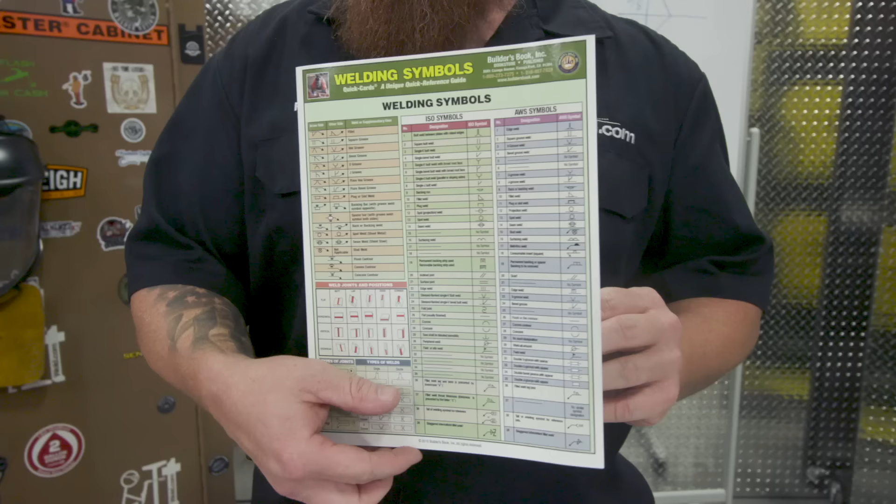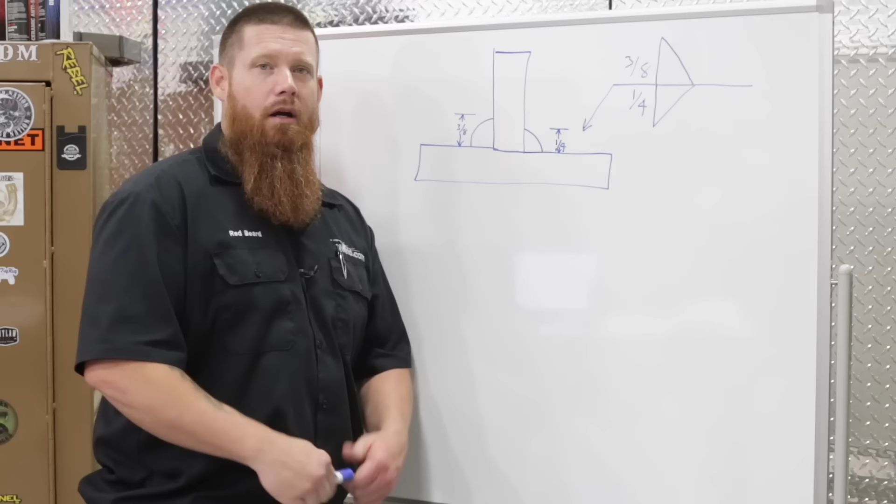All right, let's go back to the board for a quick recap on fillet welds. Last time we discussed arrow side, other side, different sides of a weldment. In this case, it's a fillet weld on a T-joint, so we have arrow side 1/4 inch fillet weld, and other side 3/8 fillet weld.

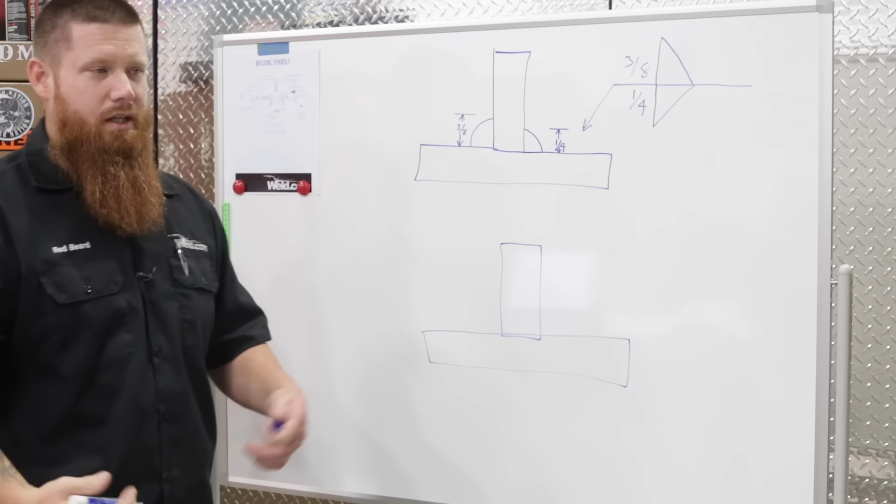One additional thing we can do is if we have unequal leg lengths. This isn't something I've ever come across myself, but if the engineer specs out for unequal leg lengths, this is what that symbol would look like.

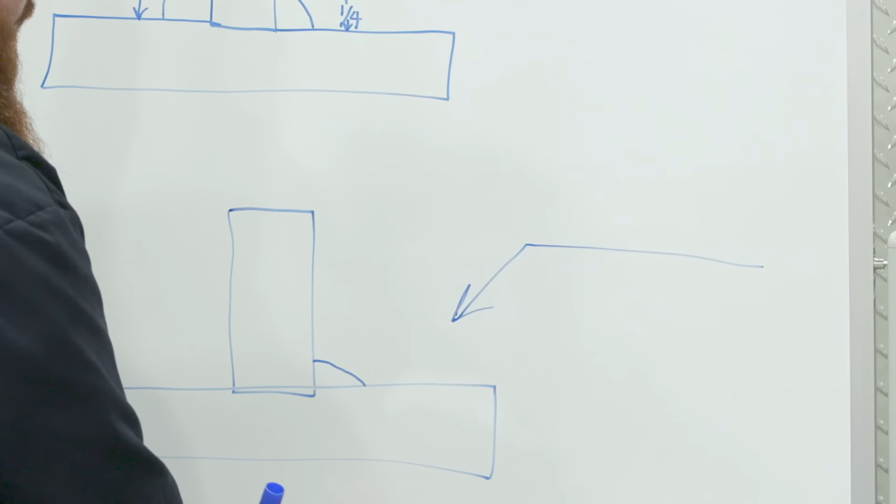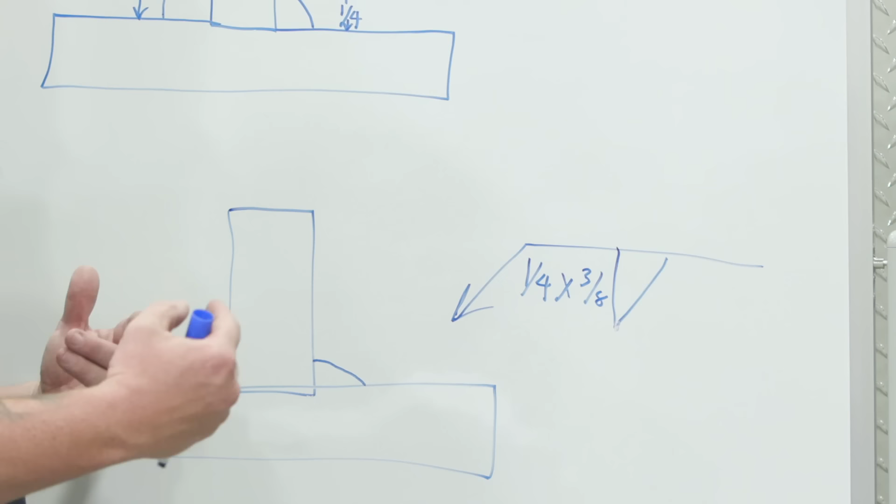It's going to be the same thing—arrow side or other side, doesn't matter. In this case we'll go with the arrow side, and let's say they want a 1/4 inch height here, and 3/8 this way. So that's written with the same fillet weld symbol, but it says 1/4 inch by 3/8. That tells me this vertical leg is going to be 1/4 inch tall, whereas my horizontal leg is going to be 3/8. Very uncommon, but if you see what looks like a math problem brewing up in the corner, that's exactly what it means: unequal leg lengths.

Basically all you're going to have to do is adjust your torch or electrode angle up a little bit higher to deposit more filler metal on the horizontal piece than on the vertical.

All right, so that pretty much covers the majority of what we discussed in episode 1. Let's go ahead and erase this—we're going to get into some supplementary symbols using fillet welds, then dive into the grooves.

So what we have here, I just drew a box column, or box tube, square tube, and a base plate. Very simple, very common connection.

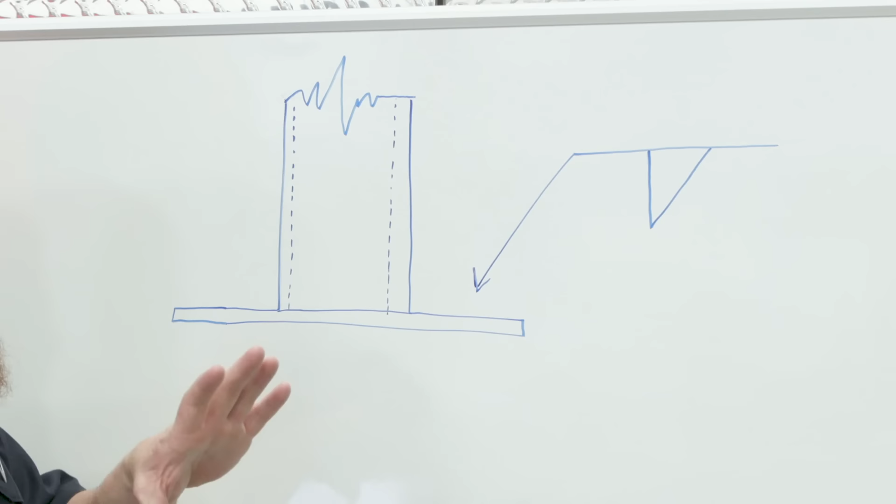We'll talk a little bit about blueprints real quick. This dotted line is your hidden line—that tells me there's something on the inside I can't see, which is just the other edge of that square tube. This right here is a long break. That tells me this column or post is much longer, but for the sake of space on the paper, they just put a long break on there because everything is going to be typical or symmetrical the full length of it.

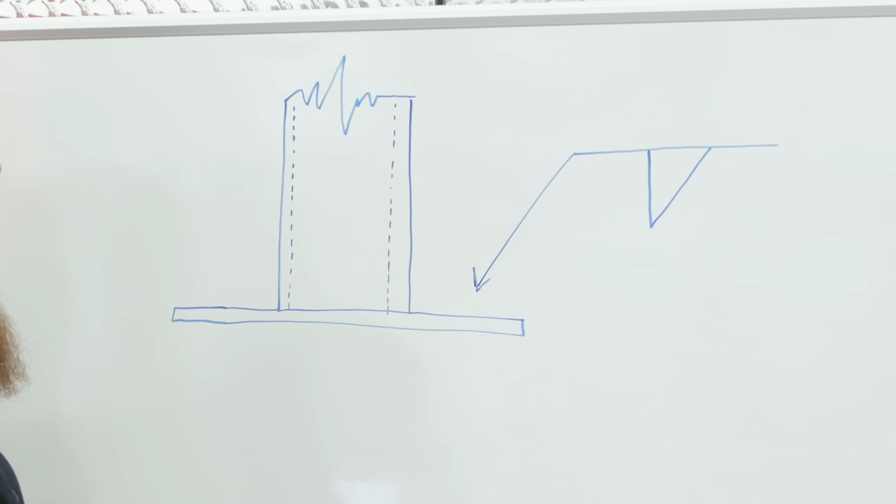So let's get back into welding symbols. Square tube—we're going to go ahead and put a 3/8 weld on here. And now here's your first supplementary symbol: this circle right here. This circle tells me to weld all the way around.

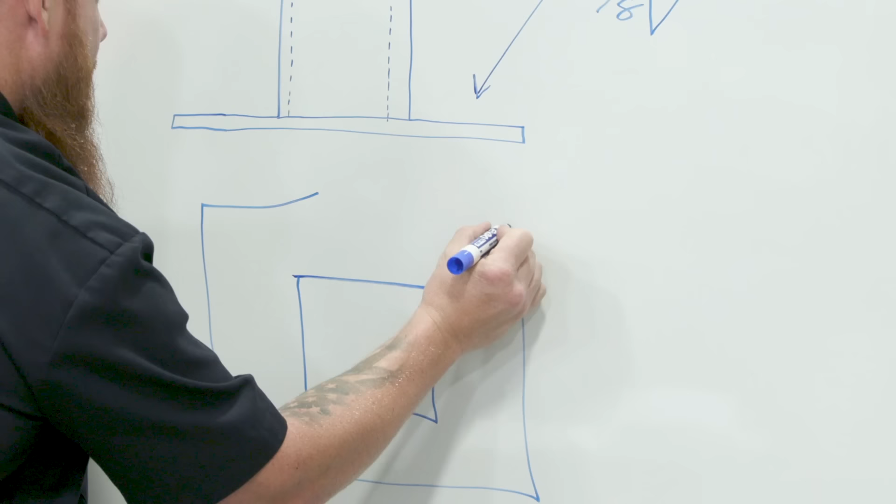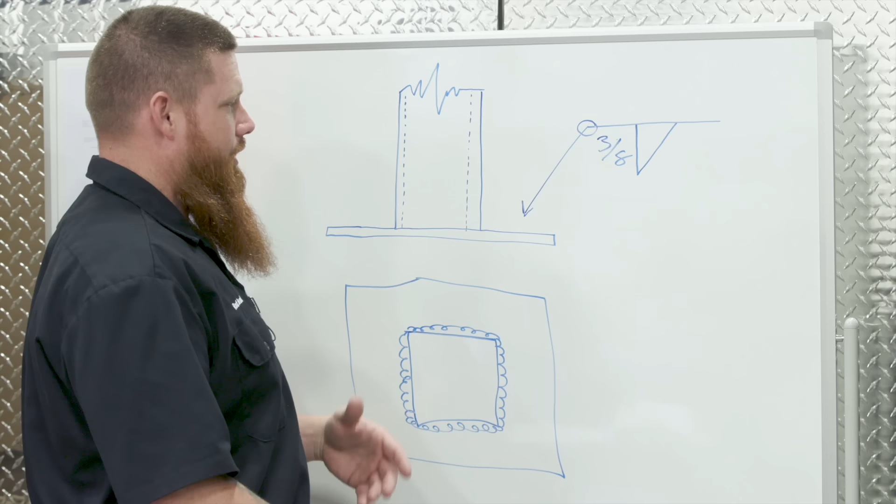So what's that going to look like? There's my square tube again, sitting on top of the base plate, and I'm going to weld all the way around. Now the weld-all-the-way-around symbol should never be on anything like a T-joint, because you technically can't weld all the way around—you can't put a fillet weld on the ends. That's why they don't do that. They'll tell you to fillet weld on one side, fillet weld on the other, if you need weld on both sides. So this is the weld-all-the-way-around symbol.

Now if I go like this and put a little flag up here, this tells me that this weld is going to take place somewhere other than the initial point of construction.

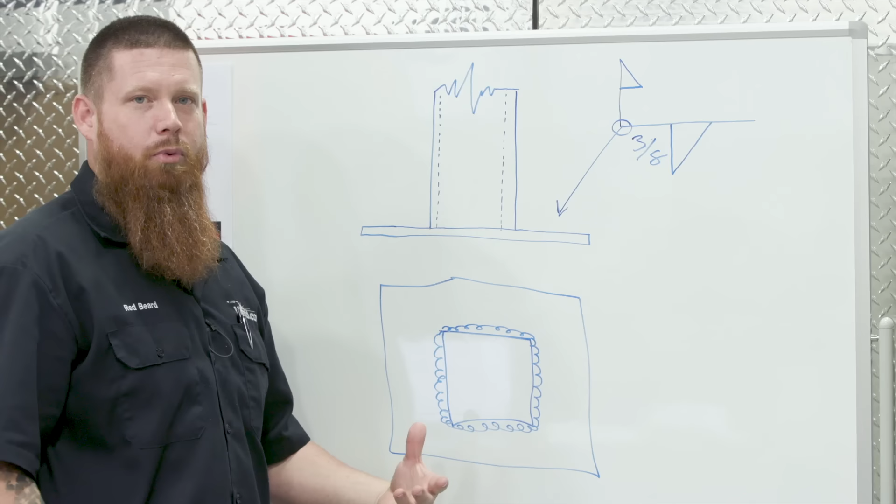So let's say that the square tube is cut to measure and punched in the shop, but they're going to take all this stuff out to the field and weld it in place. What they would do is most likely mount this to the concrete, set it in place, and weld that out in the field. Okay, so that covers your weld all the way around symbol and your field weld symbol.

And then we're just going to have a 3/8 weld that's going to go 360 degrees around there. So those are two supplementary symbols.

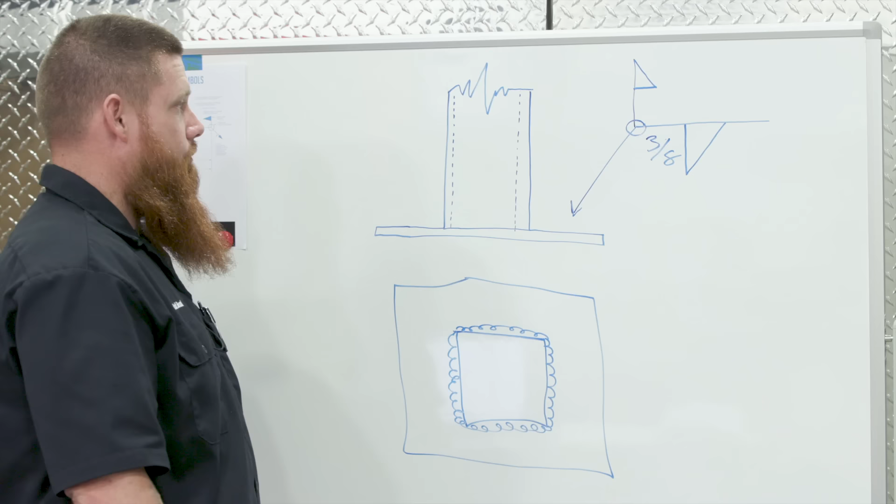All right, so now that we've covered the supplementary symbols, let's go ahead and move into groove welds. Let's talk about the different types of grooves we can have when we do these. We have a square groove, scarf, V, a bevel, usually a single bevel, U, J, a flare V, and a flare bevel.

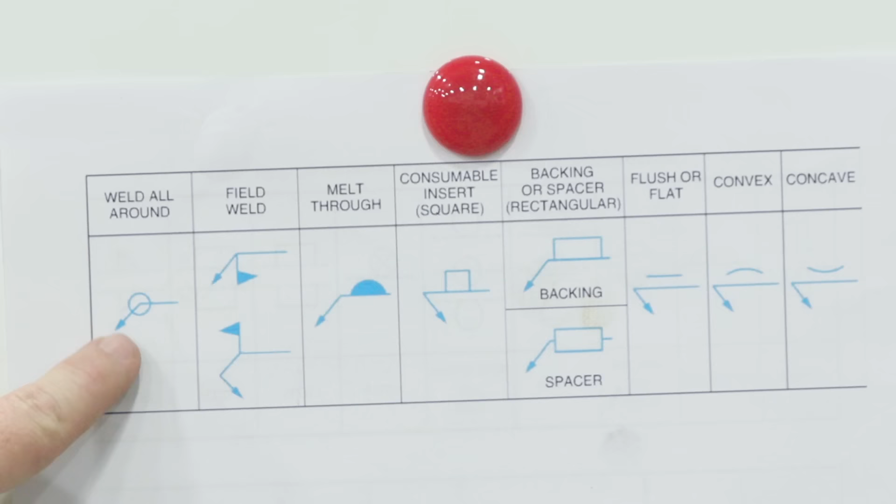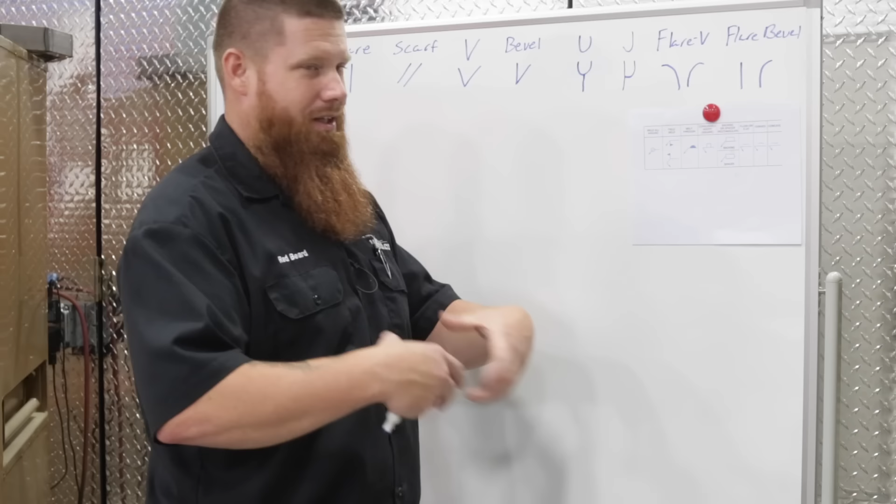And our supplementary symbols are weld all the way around, which we just discussed, field weld symbol, meaning it's going to take place at another point other than its initial point of construction, melt-through symbol - you can think of this as your weld reinforcement or on the back side of the root. Consumable insert, I don't know if you guys have ever had to deal with those - it's actually an insert that keeps the spacing, so it gets consumed during the welding process. Backing or spacer, rectangular bar, so you have a spacer here as well, and then the backing, flush or flat.

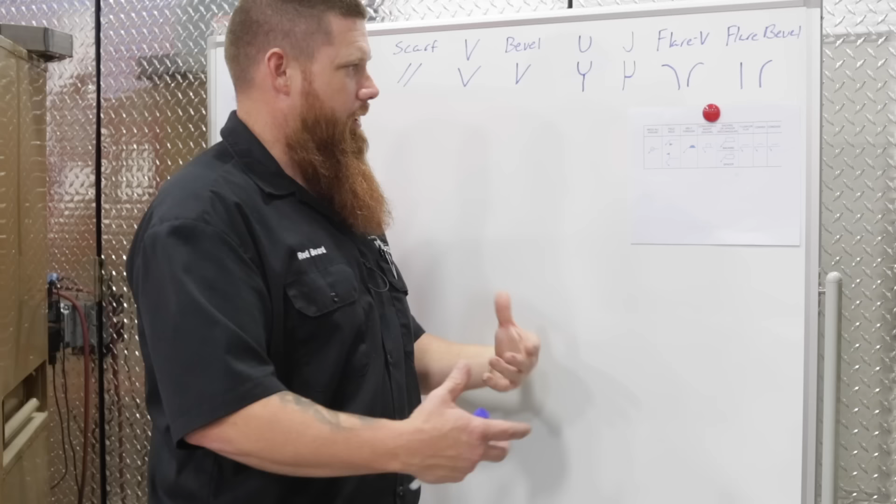So these are all of our contours. These are the different types of contours or the shapes that our welds can have. You have flat, convex, and concave, and we'll get into this a little bit further later on in this episode, talking about how we're going to make these profiles, how we're going to reshape these if it's not done during the welding process, because there's a couple different options available, and it's going to all depend on what is spec'd out by the engineer.

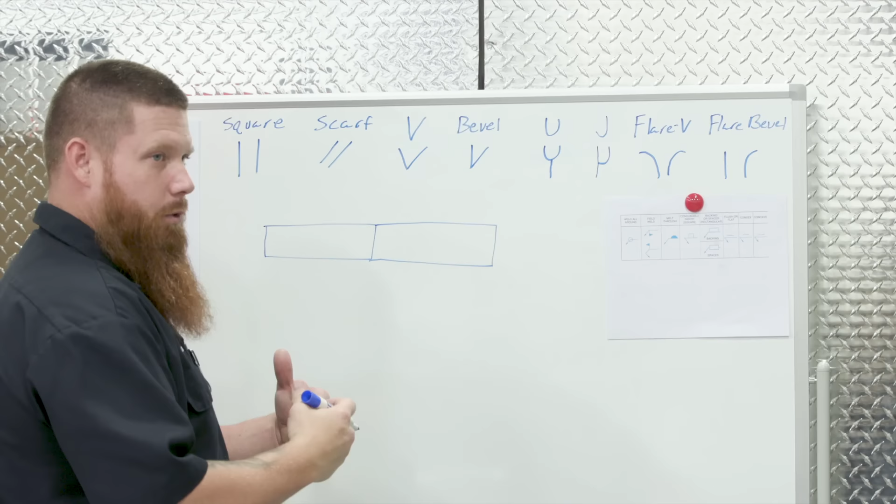So let's go ahead and start off with a regular square groove butt joint. Just two pieces pushed tight together. And our welding symbol for this is just going to be this square groove right here.

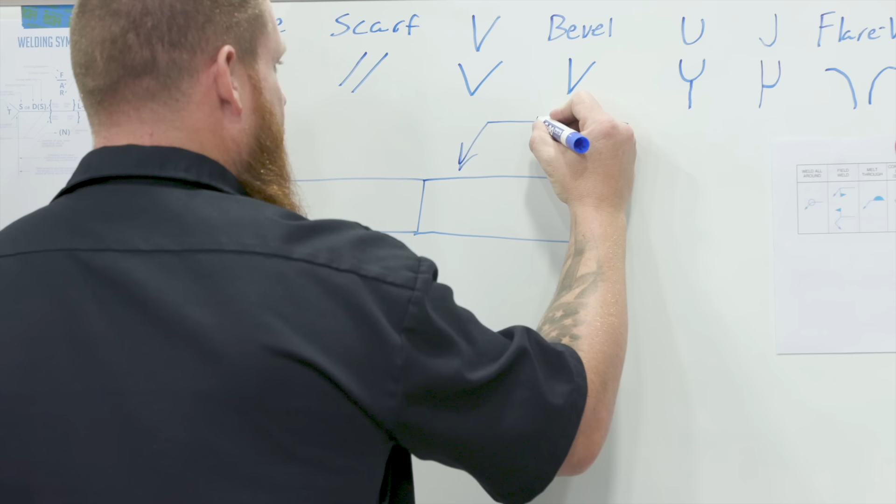We're going to add a melt-through symbol on here. And the melt-through symbol, you'll notice it's completely filled in. If we get into back weld or backing, this is going to be hollow - you're just going to have that little dome in there. We'll talk about that more later.

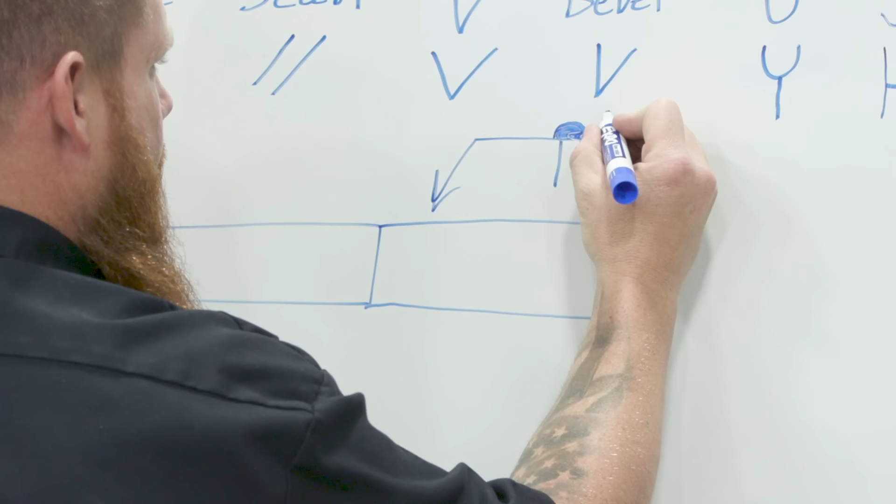So this weld, let's say what it should have here to the right-hand side of this melt-through symbol is a number. So in this case, let's go with 1/16. That means that when I weld this piece in here, I need to have 1/16 of an inch below here. Okay, and that's just a typical square groove joint. With 1/16 melt through, you can have 1/8 inch melt through - it's all going to depend on what the engineer has spec'd out for you.

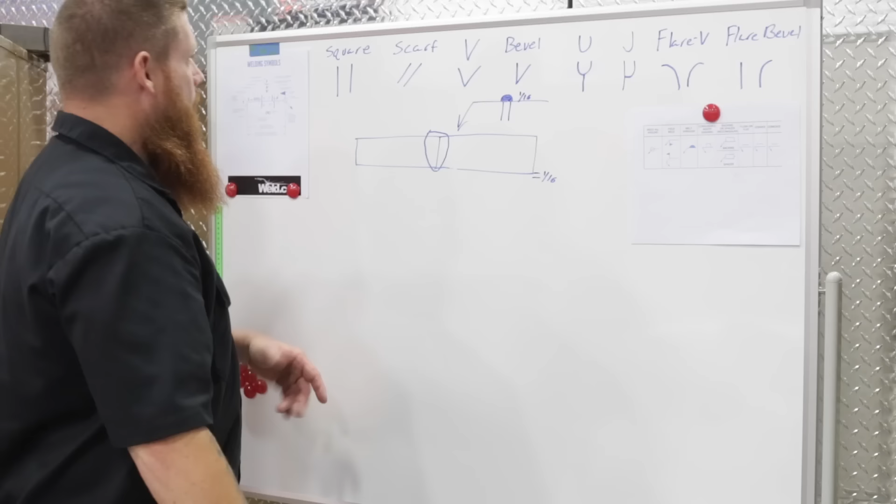I'm going to skip the scarf because it's very uncommon. I've never used that. I've never known anybody to use that. We'll skip over that one.

We'll go to a more common joint configuration, which is the V. So the first thing we're going to do is draw out our two pieces. We'll put the welding symbol in there, and then we'll go ahead and talk about how we're going to prep this material. We put our V in here. So what that's going to tell me is this V is on the arrow side, so it's up here. So we'll go ahead and remove this material here.

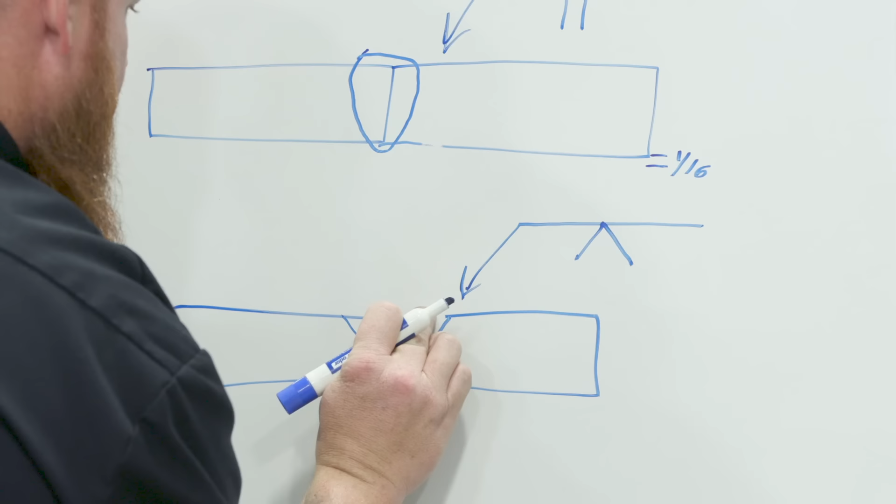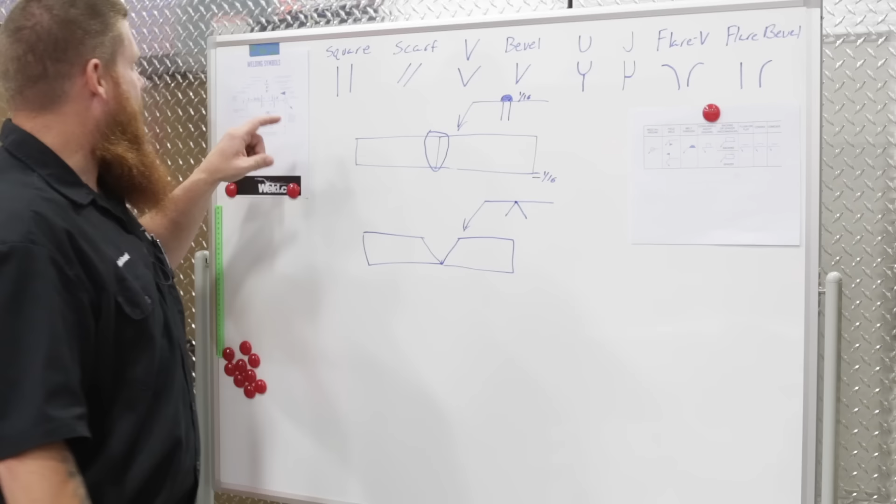But how much are we going to remove? Is there going to be a root gap in here? That's information we need to know. So here's another handy little chart, this welding symbols chart. You can actually get this from our Weld.com website. It's free to download, you can print it off 8.5 by 11, 24 by 36, whatever size. It's good to hang in the shop.

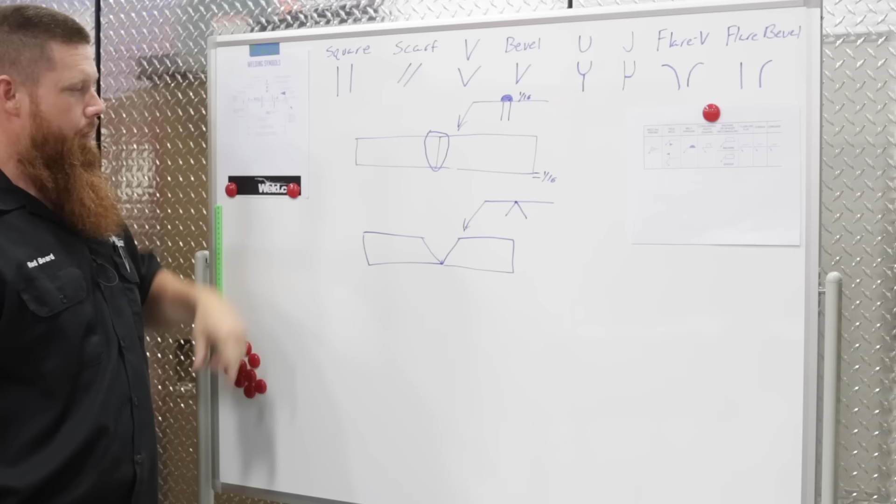And it's just a quick reference guide of where all this information should be. So if we look right up here, we have root opening, angle of our groove or groove angle, and then the finish or the contour. So let's say we're going to have a 1/16 opening - that's going to go right in here inside the welding symbol. And let's say it's pretty common, let's go with a 60-degree angle. That means I need to bevel each plate at 30 degrees, so I have a 60-degree included angle.

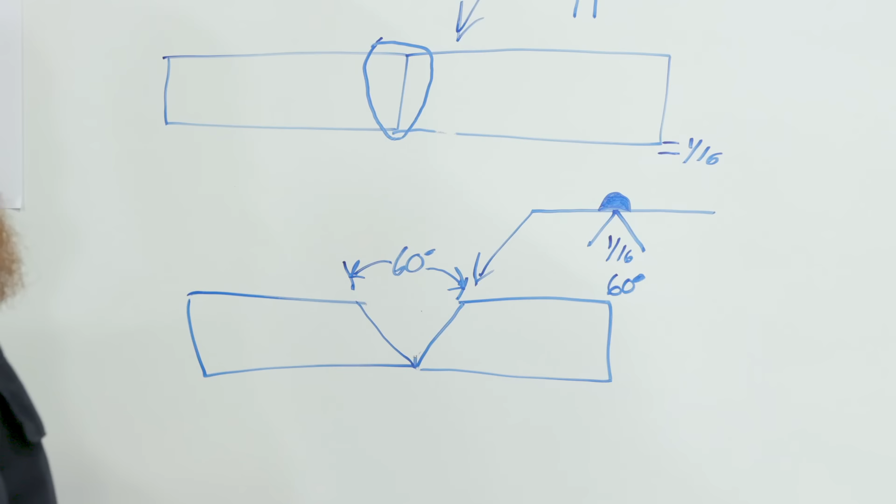And then we'll go ahead and add some melt through on here because we're talking about that. Remember, this gets filled in. And what is that weld going to look like? Well, I don't have any weld lengths or depths or penetration, so it doesn't tell me how far to prep the joint. So as the welder, I'm going to assume that the joint preparation takes place throughout the whole piece.

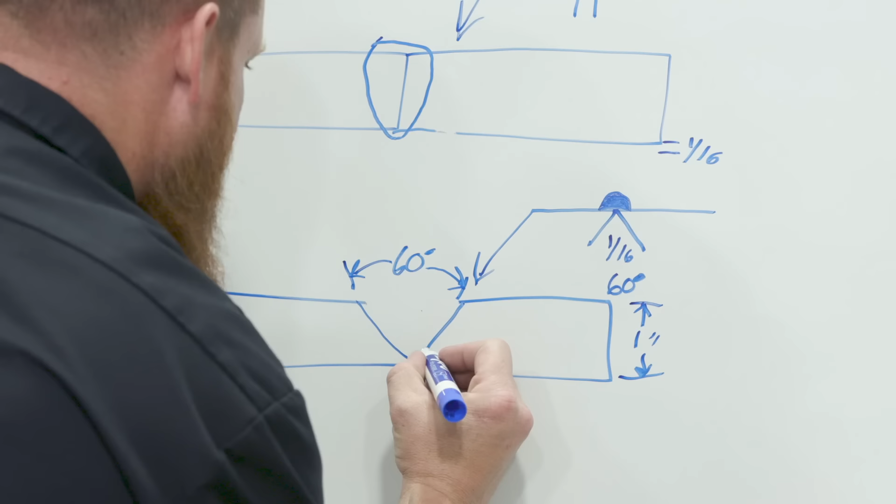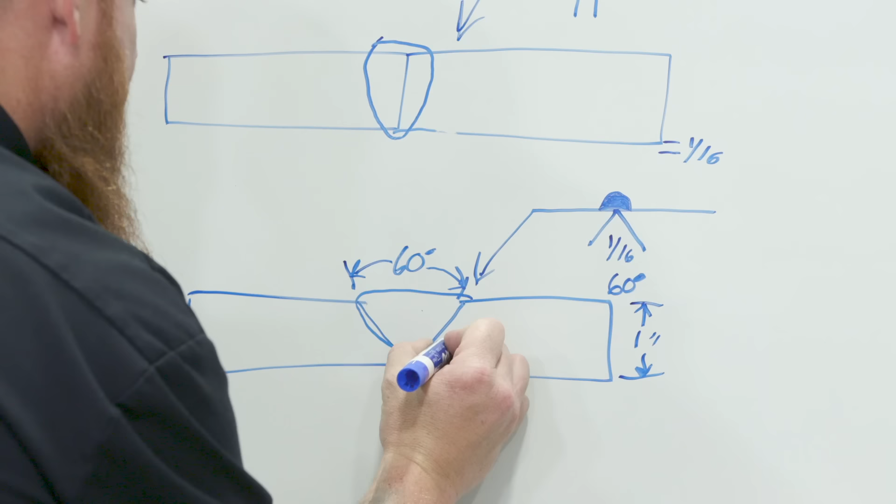Okay, let's say that this is a 1-inch thick piece of material. So we have our 30-degree bevel on each plate for a 60-degree included angle. We'll go ahead and put a 1/16 root gap in here. So when we put that weld in there, we're going to fill that up. Remember, flush to 1/8 of an inch. We're going to poke down 1/16 down here of our melt through, and that's where that symbol would be. So standard square groove, single V bevel, and we just build on it from here.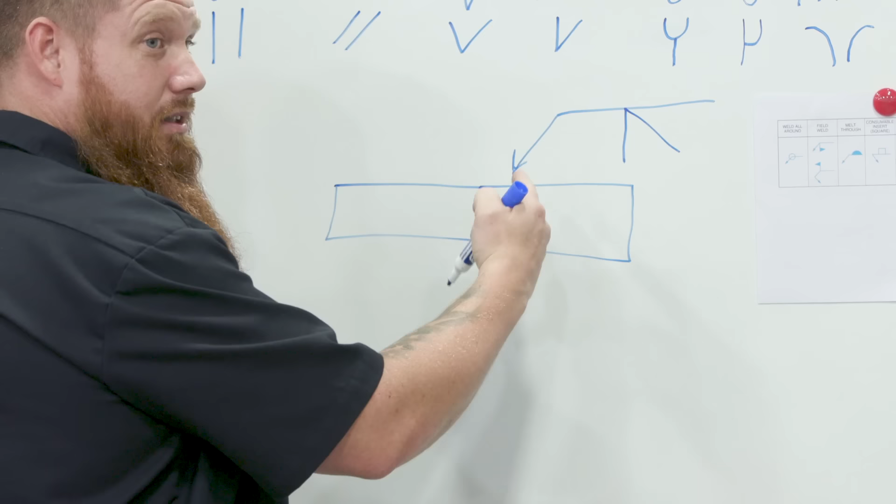All right, so next up, let's talk about our single bevel groove. Again, we're going to have our two pieces. Welding symbol is going to give us some information here. Remember that vertical leg is always going to be on the left-hand side, it should never be opposite. Joint preparation is taking place on the arrow side. And this arrow is just telling me, hey, one of these plates have to get a bevel on them. It's not significant—this instance I'm going to show you an instance where it is. Okay, so I'm just going to pick a side. Left or right, doesn't matter.

We'll go ahead and we'll put an 1/8 inch root opening in here. Let's call that 1/8, and then we'll do a 30-degree bevel on this single piece. That means that from here to here is 30 degrees. And we'll go ahead and we'll run 1/8 inch melt through. Called melt through here, but essentially it's just weld reinforcement. So that weld's going to look something like this. We're going to be flush to 1/8 inch up here, depending on the material thickness, and then we're going to have about 1/8 inch sticking out down here.

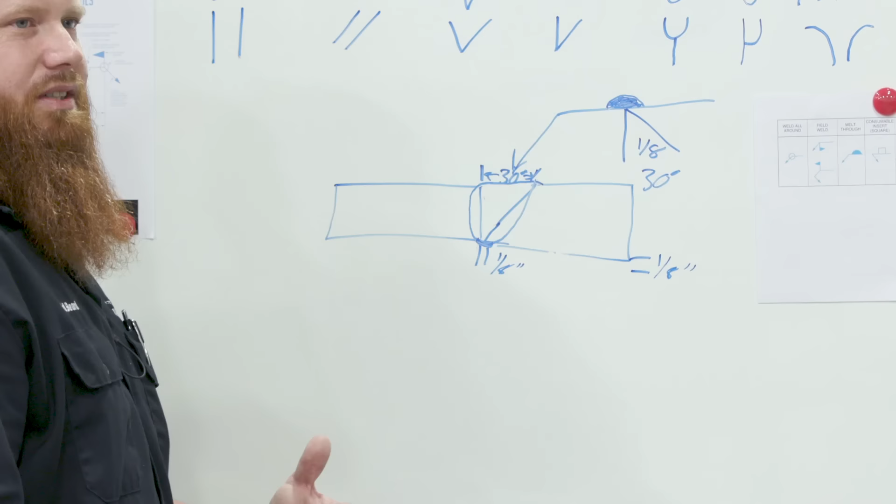But what if there is side significance? What if it tells me exactly how much of that bevel to prep, right? Let's go ahead and talk about that. So here I have two pieces. Let's say that the engineer is telling me specifically, you need to bevel this piece over here. This side right here is the side that's going to receive the joint preparation. So how is he going to tell me that, right?

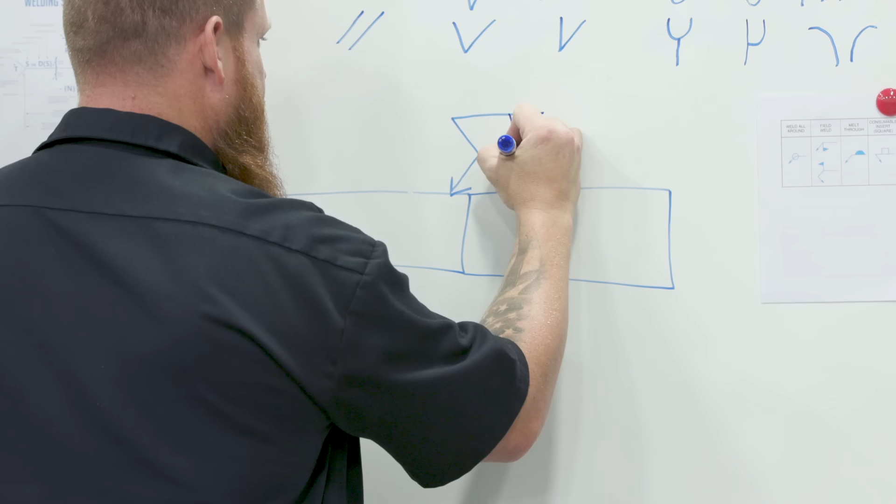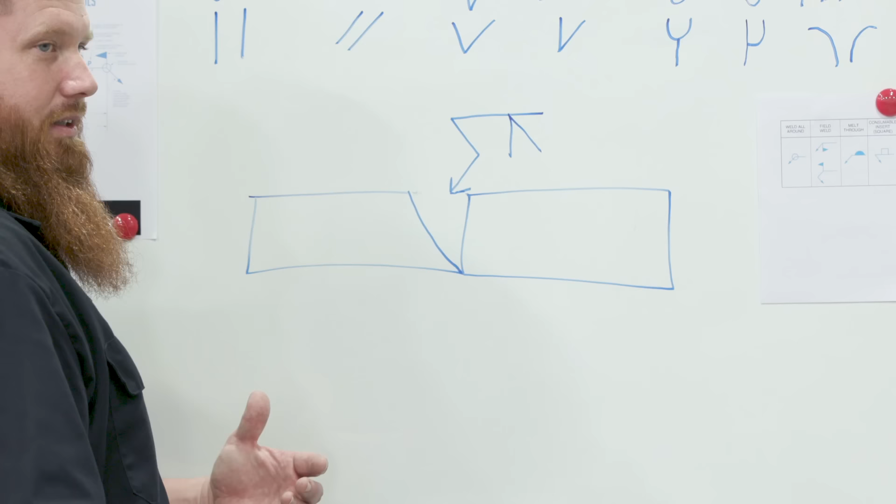I have to put a break in my arrow line. Okay, so because I have this break here, that means this is the side that the joint preparation is actually going to occur. Here's my single V again, so that tells me that I need to open this side up because now, because of this arrow, this break in the arrow, I have side significance. If I wanted to break this side over here, the arrow would just break back the other way. See how the arrow breaks back to this piece right here? Now this is the side that's going to receive the joint preparation. So I'm going to go ahead and bust that out, and then you'd still have your melt through symbol, root opening, as well as your included angle.

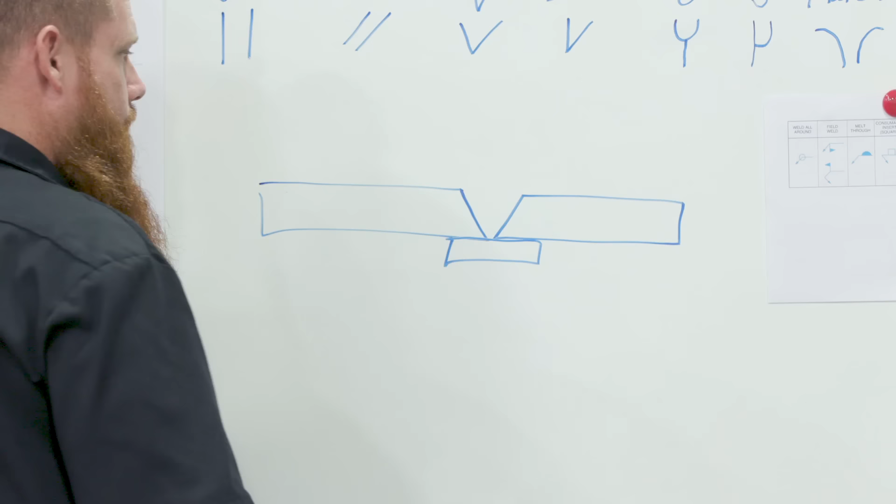So far these have been open roots, so let's talk about something with backing. We've done this a couple of times before on previous episodes. Let's talk about our standard, everyday D1.1 B-U2a joint configuration. A lot of you guys are familiar with this. Okay, standard weld with backing. We got some 3/8 plates here. Now, what's this welding symbol going to look like? Now, because both pieces are getting prepared or prepped, it doesn't matter.

I don't have to put a break in the arrow. Okay, here's my bevel, right? Here's my single V groove. And my backing bar is going to go on the top. Remember, the backing bar is on the other side, so where's this going to occur? On the other side. The V is going to go right here on the arrow side because it's on the bottom half. Okay, we'll go with a 3/16 root opening and a 45-degree bevel.

Notice again, there's no length or dimensions here, so that preparation is going to extend all the way through. We'll do a partial joint penetration here in a second, but for complete joint penetration, it's not going to give me a depth or any other dimensions.

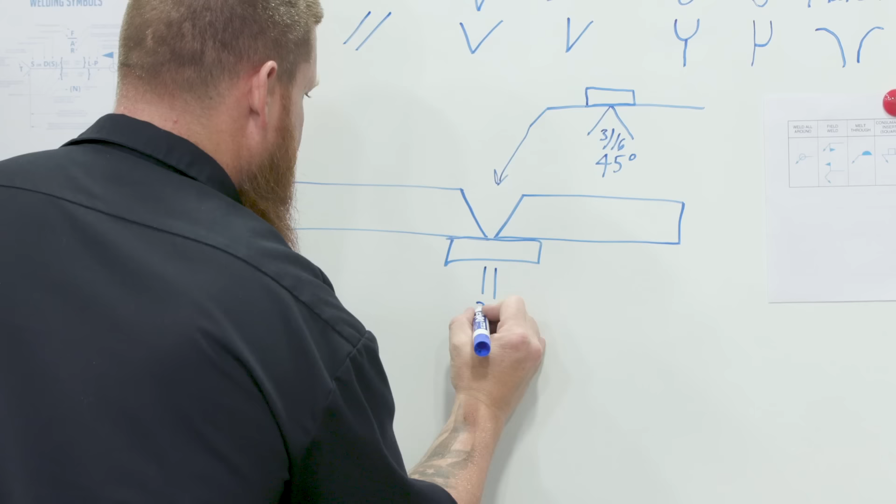Okay, so we have a 3/16 root opening. That's what we have in here. And then this included angle right here is going to be 45 degrees.

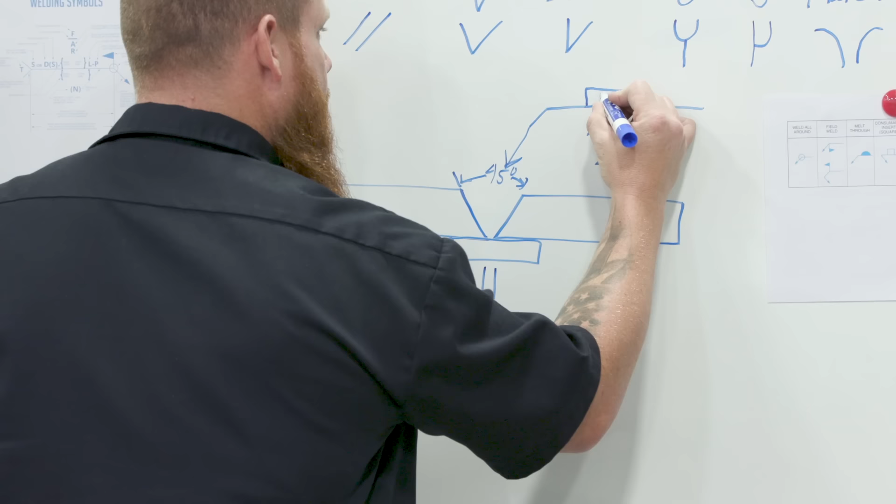Now let's say that this backing bar had to be removed after the weld was done. They would put an R inside that backing. If there's no R inside that backing, you're going to leave it on. It's going to go into construction, that's the end product, right? So you don't have to worry about it. If there's not an R in there, your work's done once this is welded out and it's inspected.

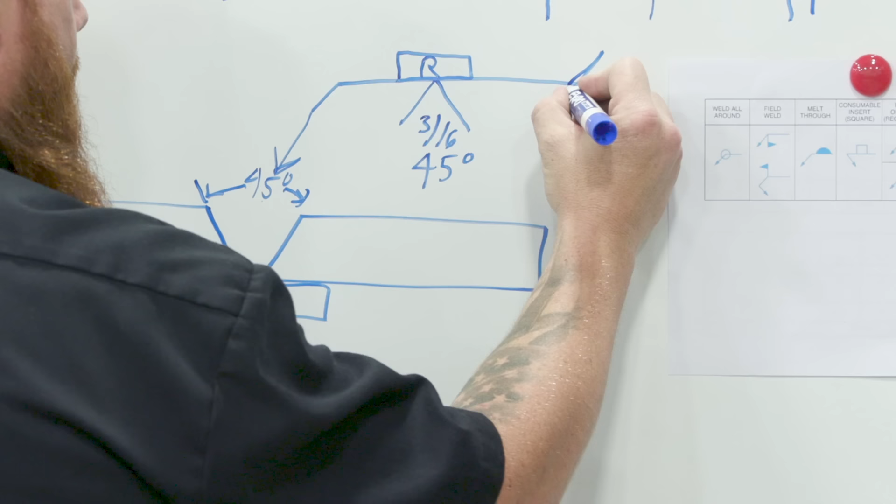Now it doesn't mean just because of the position that this stuff is in, don't get confused and think everything's in the flat position, because these welding symbols don't tell you what position. I could go in here and say it has to be welded in 3G. But for the most part in production, you're always going to weld everything in position anyway. So if I can get to this joint and weld it flat, that's what I'm going to do, because I don't want to go to work and show off how great a welder I am going vertical and overhead. I'm going to do what's fastest for the company, what's most cost effective, and that would be the flat position.

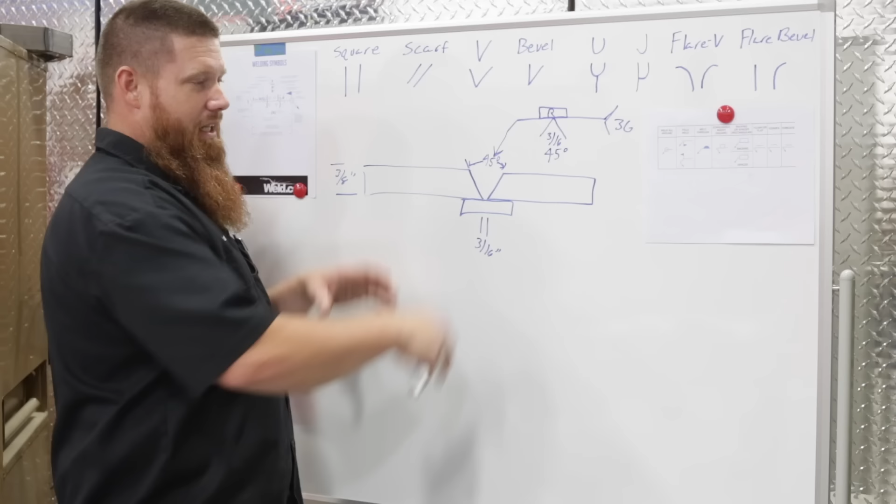Once you get into construction, you're out in the field, you don't have the option, right? You can't turn the building on its side so you can weld it flat. You have to learn to weld out of position. So this could be vertical, overhead, could be at a 45-degree angle, whatever the case may be. You're going to have to refer back to the prints and see exactly where this material is to be located. But this is how we would prep the material that we're going to go ahead and weld on.

All right, so what's all this up here? Let's go ahead and discuss it. Let's say I have some 1-inch plate here. I know I'm doing a single V groove because that's the weld symbol that I have right here, right?

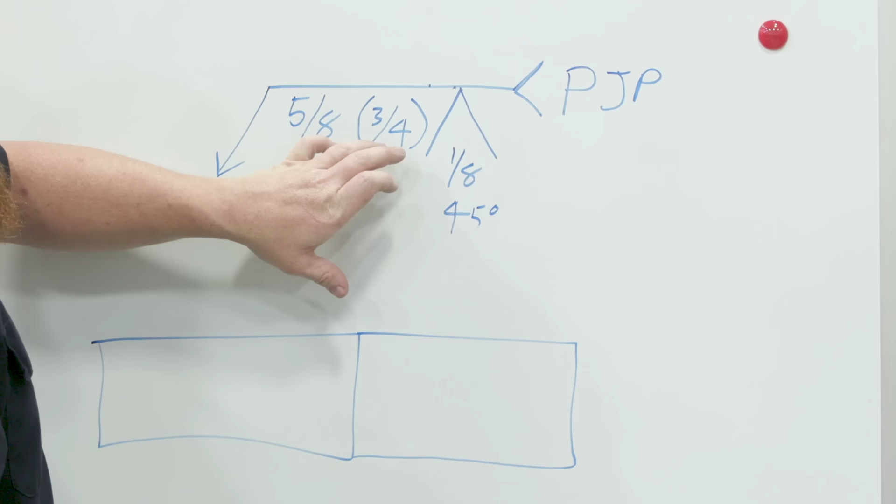Right here is my depth of preparation, okay? And this is the depth that my weld's going to be, or the weld size. So I have 1-inch plate. I'm only going to do 5/8 of preparation. So that means that I'm going to come up to about the 3/8 mark, somewhere in there, and I'm going to bevel this back 22.5 degrees.

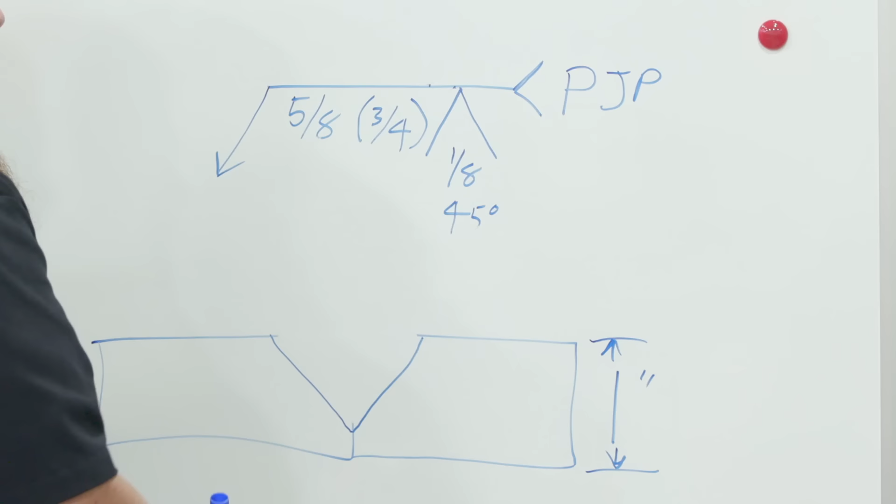Okay, how do I know it's 22.5 degrees? Because I need a 45-degree included angle. All right, so now I have my 22.5 degree bevel on here for a 45-degree included angle.

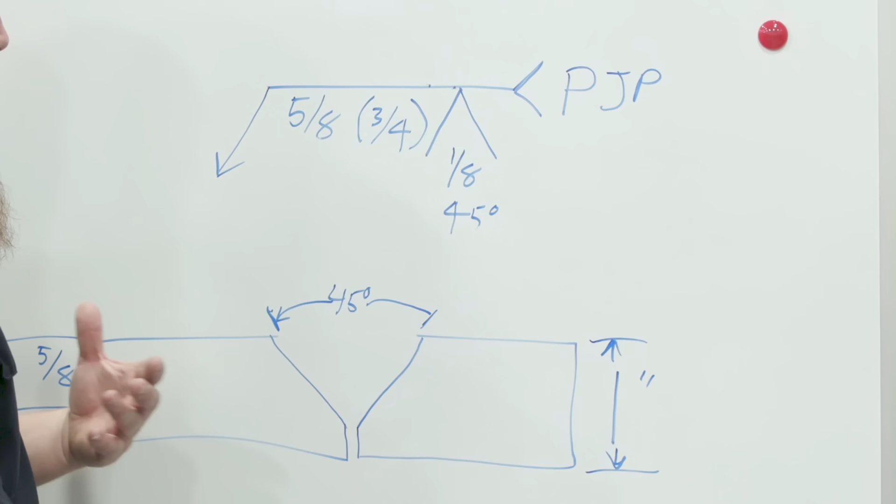Let's go ahead and put a 1/8 inch root opening in here, because we came up that 3/8 of an inch, that leaves us with the 5/8 depth of preparation. So I have 5/8 depth of joint preparation. Because we came down 5/8, that leaves me with 3/8 of a land or root face, depending on old school, new school, whether you want to get technical about it. Okay, that's the opening that I have here.

And now my weld, the depth of my weld is only going to go down 3/4 of an inch. That doesn't count what's on top. I'm penetrating in here 3/4 of an inch, so I'm going to have 3/4 of weld placement in here. So that tells me I'm going to penetrate an 1/8 inch additional past my preparation.

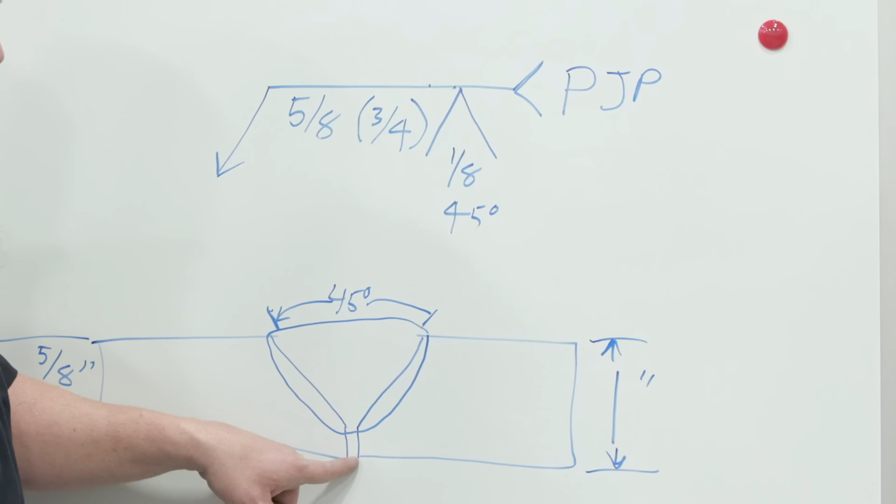And the back side of this, I'm not going to touch it. I'm just going to leave it completely open because of what is going on here in the notes section. It's partial joint penetration, so I don't want melt through. I don't want any root reinforcement on the back side of this. It tells me it's partial joint penetration, so I know that I'm not supposed to exceed the back side of that plate.

My weld should only go down 1/8 of an inch here, which leaves me about a 1/4 inch depth in this area right here. Okay, that's pretty much that symbol.

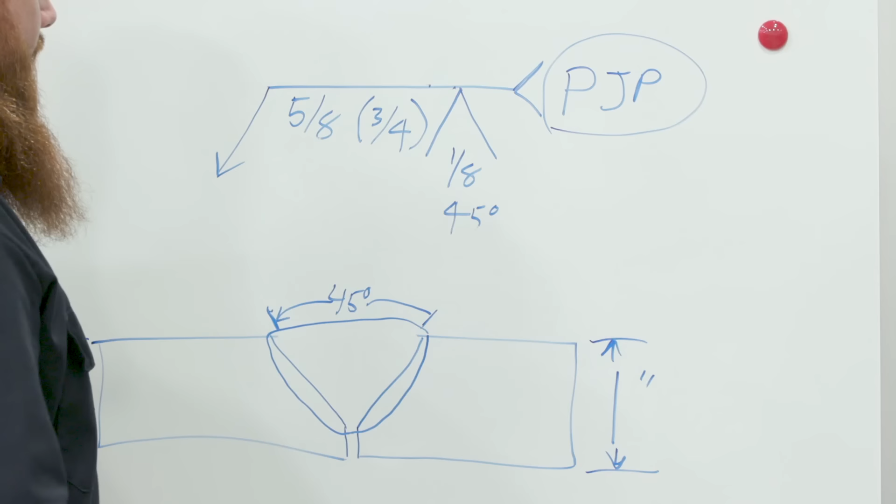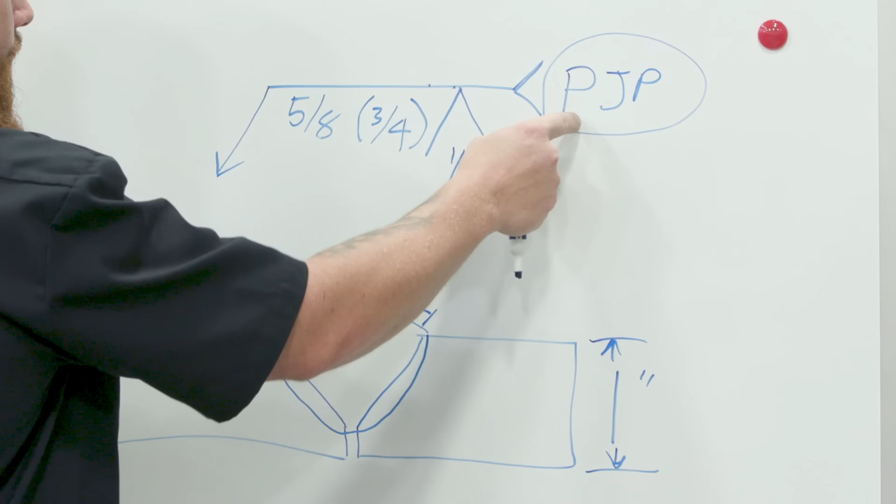When you're breaking these down, start from the left-hand side and read to the right. This tells me I have 5/8 depth of preparation, 3/4 penetration, 1/8 inch root opening, 45-degree included angle, and we're doing a partial joint penetration.

All right, so let's go ahead and check out some different instances with single V and double V joint preparation.

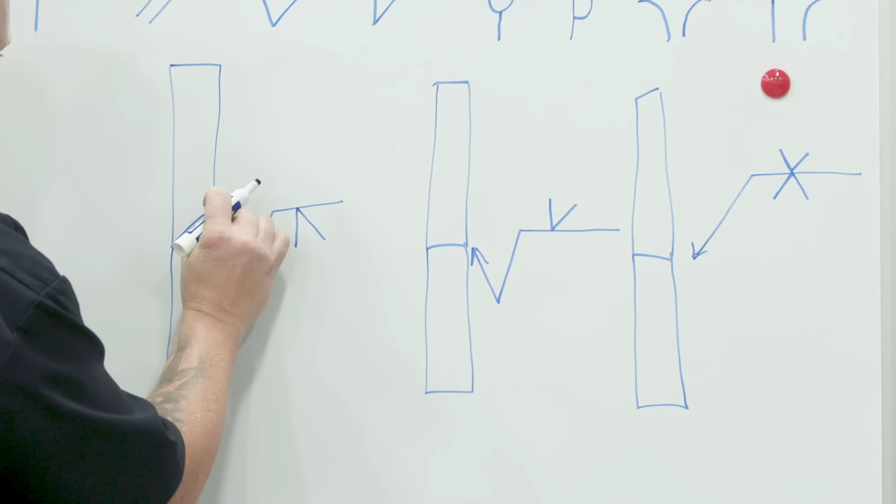So we know that this one right here, what do we have? A broken arrow, which leads me to the conclusion that this side it's pointing to is going to receive the joint preparation. Where's my symbol? My weld symbol, it's on the bottom side, so it's on arrow side, right to where that arrow is pointing. So this weld joint would look just like this. And then we would fill that in with weld metal. And if there was a melt through, that's how much we would melt through on the back end or apply weld reinforcement there.

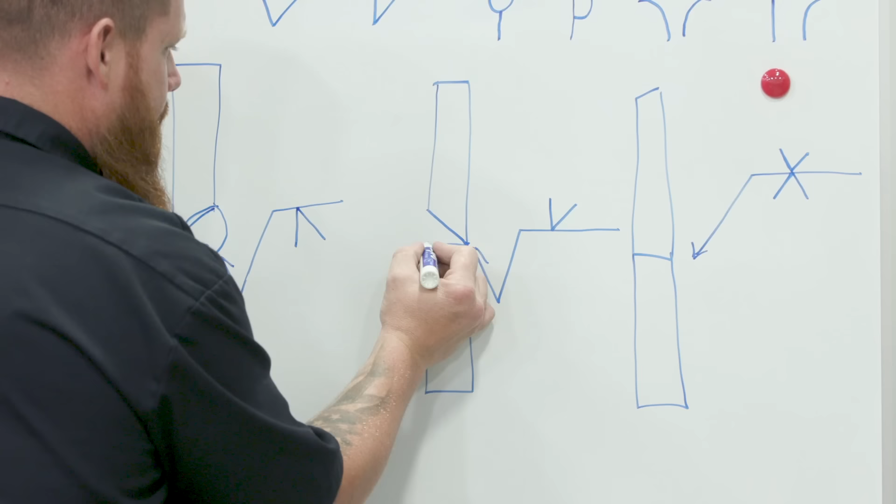What do we do over here? It's pointing to this top piece, but which side's getting the joint preparation? Other side, right? Because the weld symbol is on top, I have to put that on the other side. So in this case, this side right here would receive the preparation. And then the weld would look something like that. You just fill that in.

Now over here, we have a double V. The arrow's not pointing to either one of the joints. I've got one on top and bottom, so what would I do in this situation? Both pieces are going to receive the preparation, and the weld is going to look something similar to this.

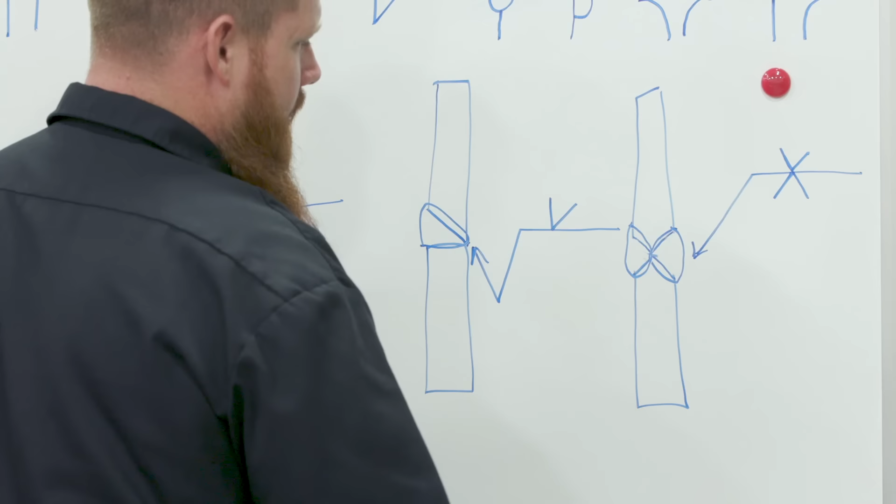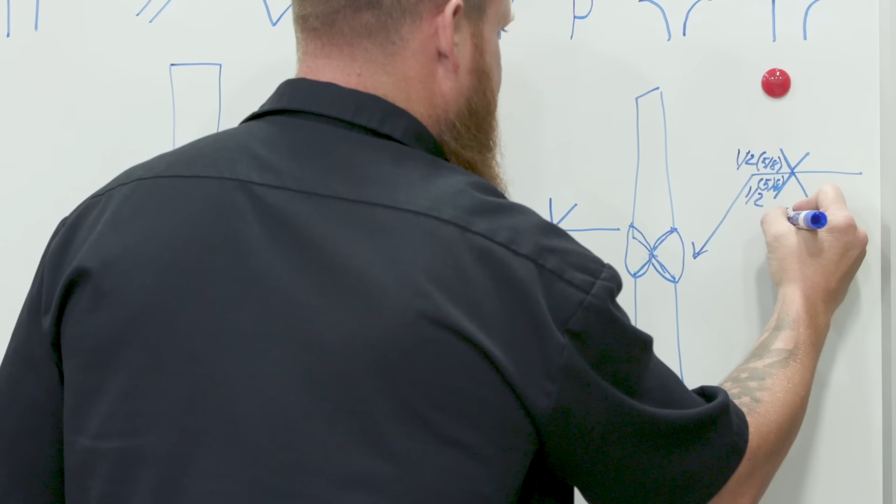Let's take it one step further. We have this set up right here. Let's say we have 1-inch plate, and I want to have 1/2 inch preparation depth, and 5/8 of weld penetration in there. So I'm going to prep these down at 60 degrees. No root opening. Okay, we have 0 root opening. They're going to touch. So essentially, I'm going to prep both of these 1/2 inch, and right in this area they're going to penetrate. One weld's going to penetrate the other 1/8 of an inch because I have a 5/8 weld depth on both sides.

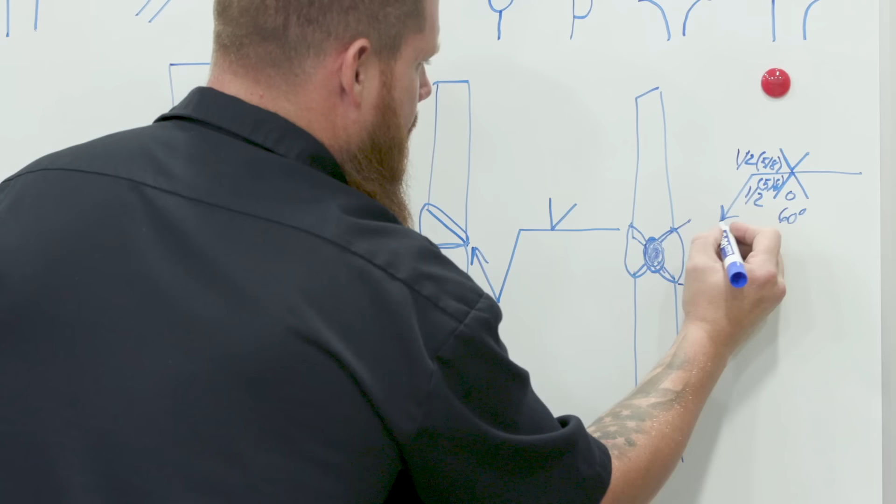This first weld right here, whichever weld you're going to do first, is going to penetrate 1/8 inch into this opening, and then when I fill this side in, we're going to go through that and penetrate into that opening. So I have an 1/8 inch overlap on the inside of that weld nugget. That's pretty much what you would do in that situation. Okay, and then obviously my included opening is going to be 60 degrees, so each plate will be beveled 30 degrees, right?

Let's move on. Now let's move up into something a little bit more difficult. This looks very complicated, but it's not. We just break it down one step at a time. So whenever we're working with a welding symbol like this, whether it's going up this way or down this way, you're always going to work from the arrow back. This is like a little recipe. So this is going to be our first step in the process, second step, third step, fourth step, et cetera, so on and so forth, right?

All right, so the first thing we're going to do is this step right here, after the joint preparation, obviously. We're going to go ahead and prep this 30 degree included angle, 1/8 inch opening. So let's go ahead, we've got our piece prepped. We have a 30 degree included angle in here, and we have an 1/8 inch opening down here. Once everything's prepped correctly, the sequence of welding is going to go like this.

We have this symbol right here, it's a backing weld. So this symbol right here represents a back weld and a backing weld. Confusing, yes I know. So what's the difference, other than backing has 'ing' at the end of the weld? A backing weld is going to go in first.

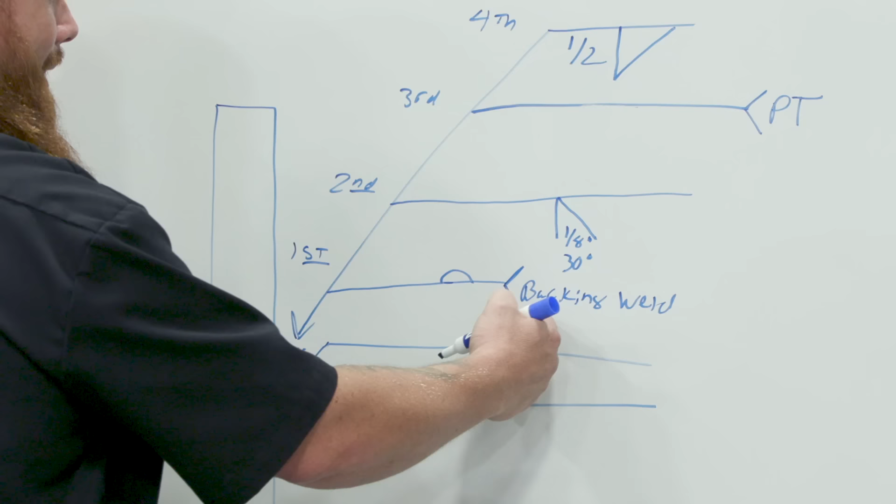A back weld will come in second. So if it was a back weld, we would actually make our groove weld first, and then we would come back, grind out that area, and go ahead and put that back weld in there. But since the backing weld is first here, we're going to go ahead and put this backing weld in right in this area.

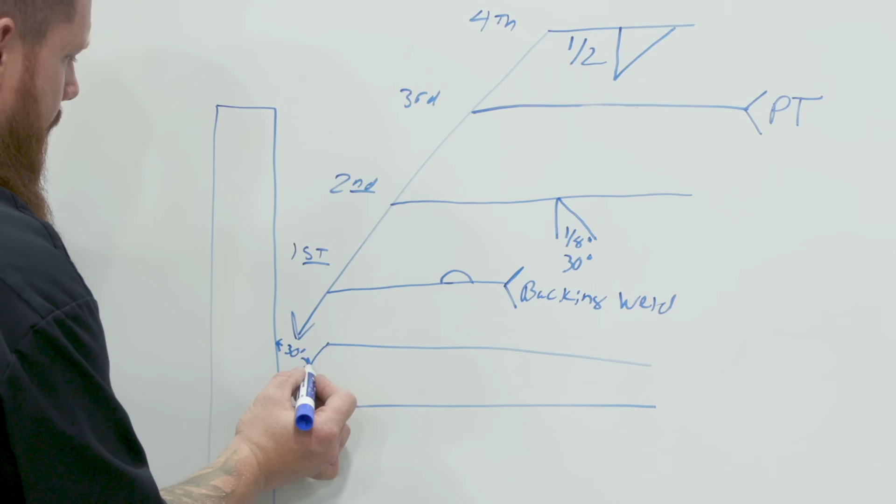Next thing we're going to do is fill this groove weld in. So you'll put all your passes in here, fill this in completely, flush to 1/8 of an inch. On to step number 3.

Well, what's this guy? I have no idea what that is, right? Penetrant testing. That means that before you move on to stage 4, the engineer wants this specific piece to be dye penetrant tested. So that's when you get to call the CWI over there if he's not on hand and say, hey, I'm ready for you. You need to come in here and spray your Cantesco dye penetrant test in here.

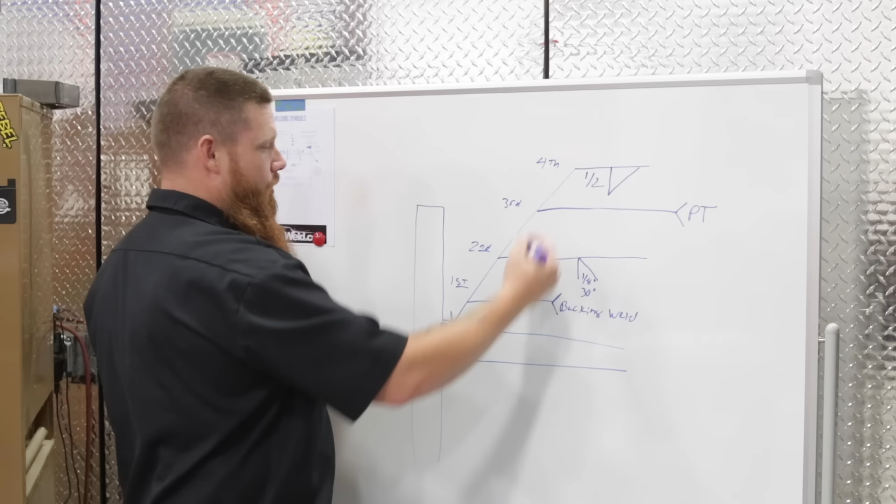Make sure I don't have any cracks before I move on to my 4th and final step. What's that going to be? A 1/2 inch fillet weld. Okay, this is a pretty common connection, especially if you get into structural steel where you've got big heavy beams. You'll put a groove weld in there, and then you'll cover that whole thing up with a fillet weld. It looks very intimidating, but it's not.

Just break it down one section at a time. If you try to look at it all at once, you're going to get overwhelmed, right? It's like eating an elephant. How do you eat an elephant? One bite at a time. First, second, third, fourth. Boom, you're done, right?

And typically, this stuff's already going to be prepped for you before you get it up in the air, especially if you're doing structural. The guys downstairs, or the people in the shop, they're going to set all your joints and your configurations for you before it even gets on site. But you should know what you're looking at, right?

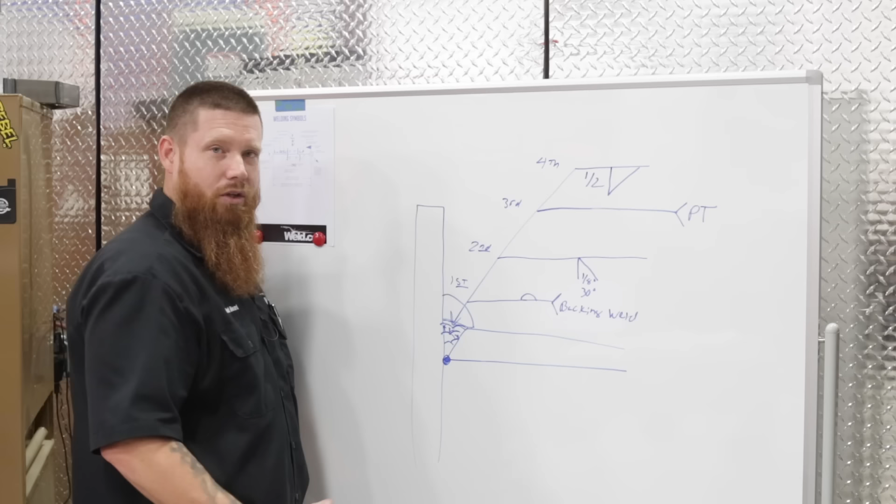Let's go ahead, we'll move into some other groove welds. So let's go ahead and talk about a U-groove real quick. These are fairly uncommon. In my line of work, I've never seen it done in structural, but we should cover it. All right, so we have a U-groove here.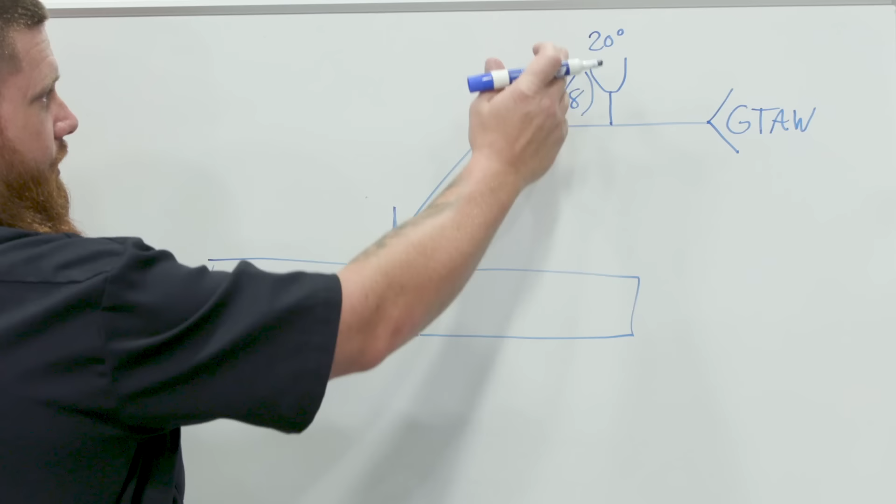So we have some material, and now which side is all of our information on? It's on the other side, so that's actually going to occur down here. So our preparation is going to be here, but remember, 1/4 inch is going to be the depth of preparation. So let's call this 1/4 inch. Okay, so we're going to go ahead up to that mark.

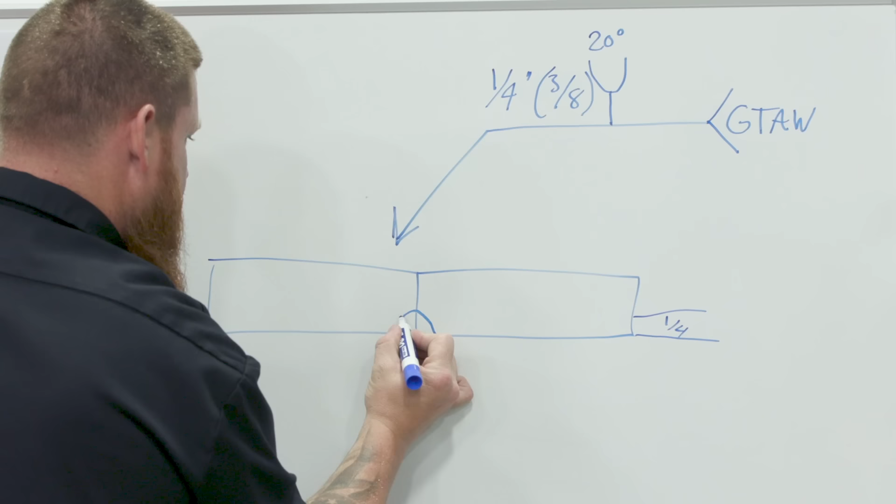Get rid of this. Our included angle, 20 degrees. And then our depth of weld is actually going to be 3/8. So that's going to penetrate about an 1/8 inch past.

Now these are typically machined. I've seen Travis Fields do this in another video where he did gas tungsten arc welding on a piece of pipe, and I believe the edges were routed. So that's another avenue you could do this with. But most of the time it's going to be machined.

You could probably get this with a grinding wheel and a carbon arc cutter if you had to, or plasma cutting. You could use a plasma arc gouging system and then clean that back up and just kind of verify your dimensions and do it that way. So that's another way of doing it if you had to do it on steel. But that's pretty much the U-groove. They're very simple, very similar to a V-groove. We're just changing the profile of that preparation in there.

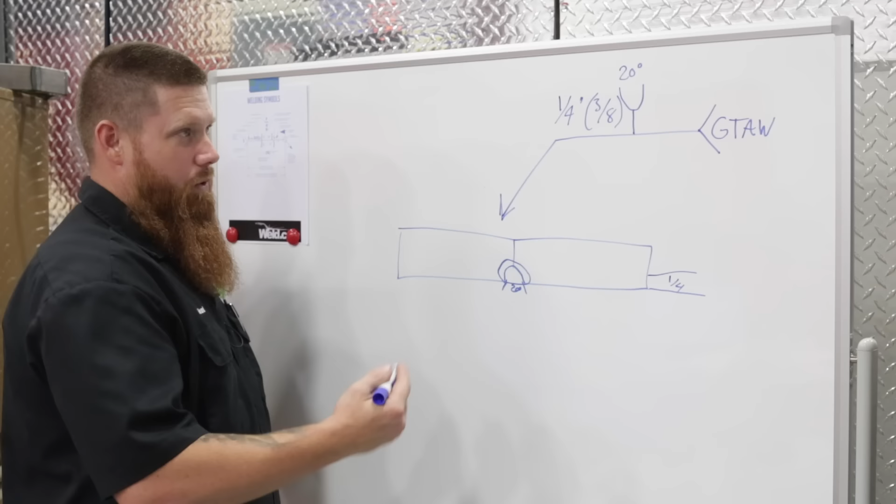So let's go ahead, we're going to work on the flare grooves next. All right, so here we have a couple of different flare V-groove welds. For instance, this right here, so if we had 2 pieces of box tubing or HSS, hollow structural section, square tube, whatever the case may be, it's telling us right here that we have 3/8 depth of preparation. Well, this is a naturally occurring joint preparation because obviously when you put these 2 members together, you're going to have 3/8 depth.

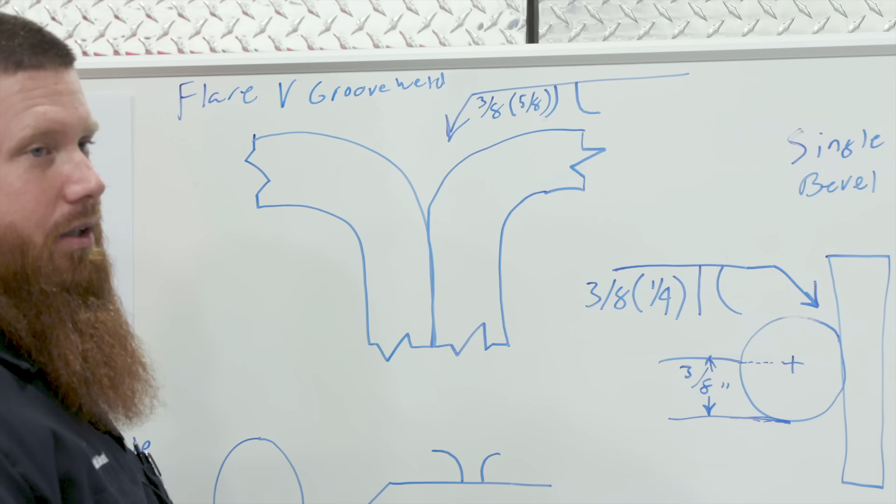That's going to be spec'd out on the type of material that they're going to provide for you, whether it's 6x6 or 4x4, whatever the thickness of the material. It's going to have a naturally occurring radius on that side. The engineer should account for that.

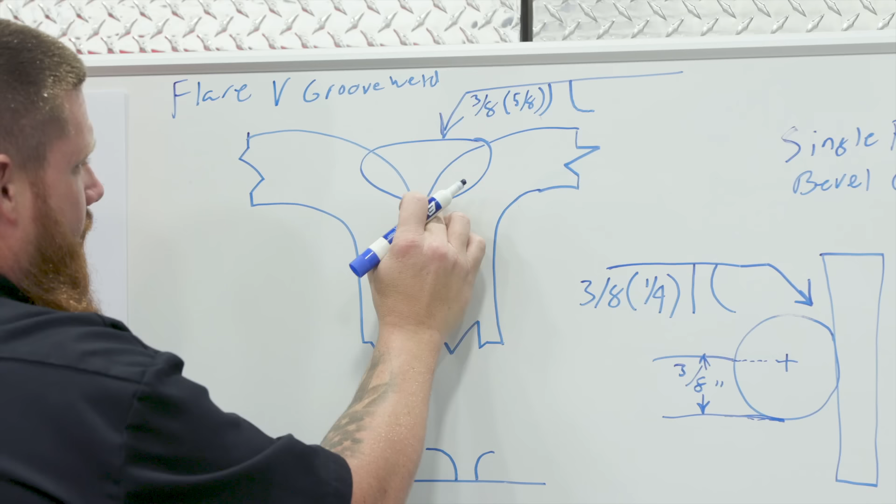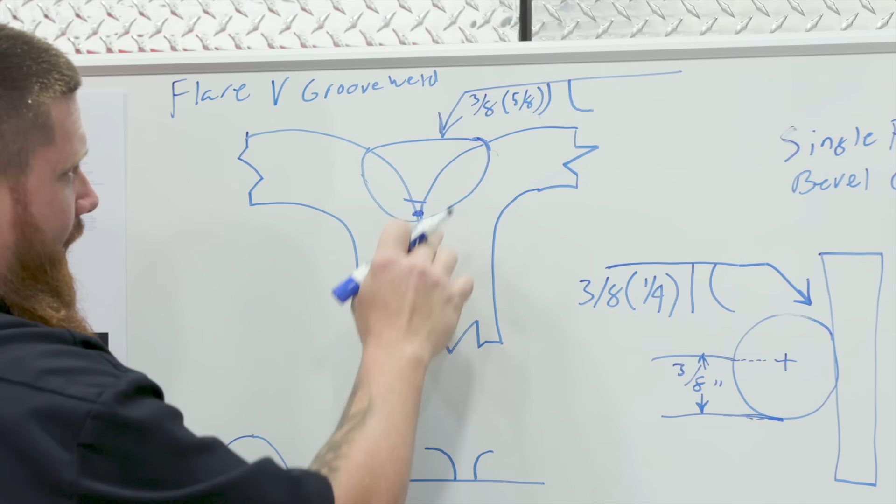What we're more concerned with is our depth of penetration. We want to make sure that we penetrate 5/8 of an inch. So you're going to want to go 1/4 inch past, where those two pieces meet hard up. So you're going to go 1/4 past that 3/8 mark. The depth should be about 3/8 there.

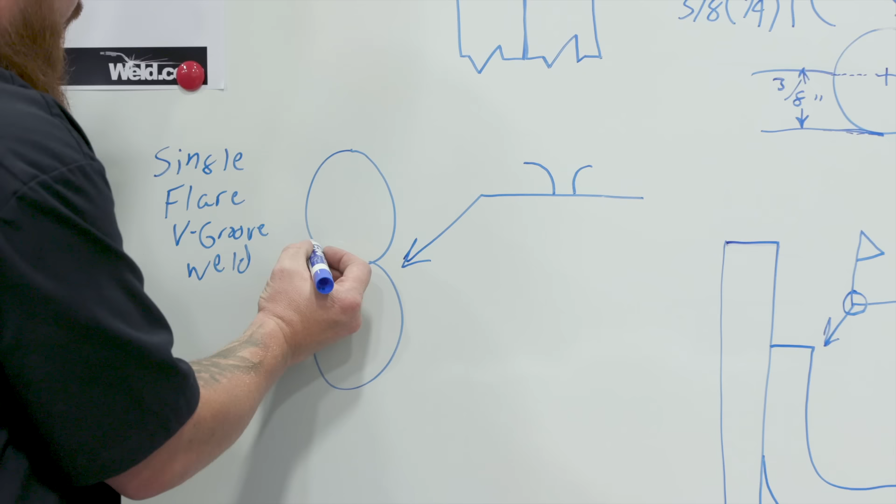We get into single flare V-groove weld. Notice our weld symbol is on one side of the reference line. So where's that pointing at, or where's that located at? It's on the other side, right? So where are we going to make the weld on this piece? This side right here is the arrow side, so we're going to go over to the other side and make that weld. Typically there's going to be some sort of dimensions in there for you, that way you can make sure you've got the appropriate size weld in that area.

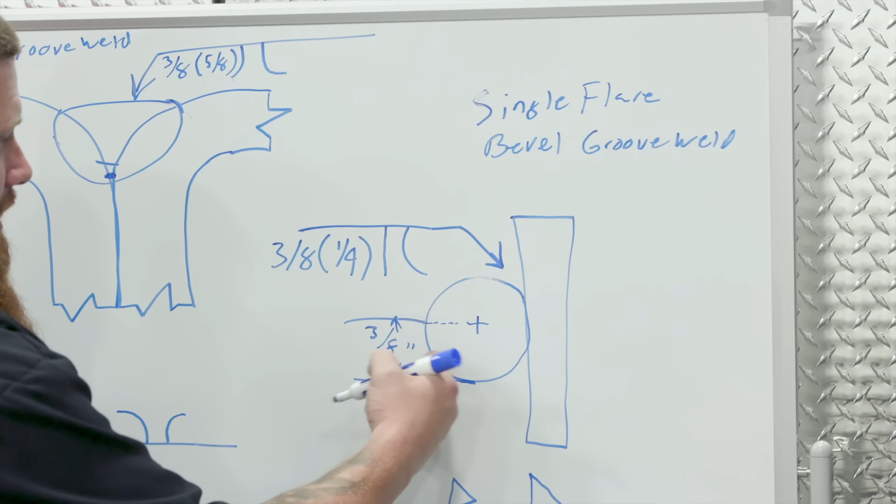Moving on, we'll go to the single flare bevel groove weld. This one looks a little complicated, but it's not. All this is saying is, again, depth of penetration is already taken care of because this is 3/8. So 3/8 is basically the radius of this material, so the diameter would be 3/4, which is going to give us a nice little 3/8 bevel in here, and it's only asking for a 1/4 inch weld in that area. So we only have to penetrate about a 1/4 inch into that area.

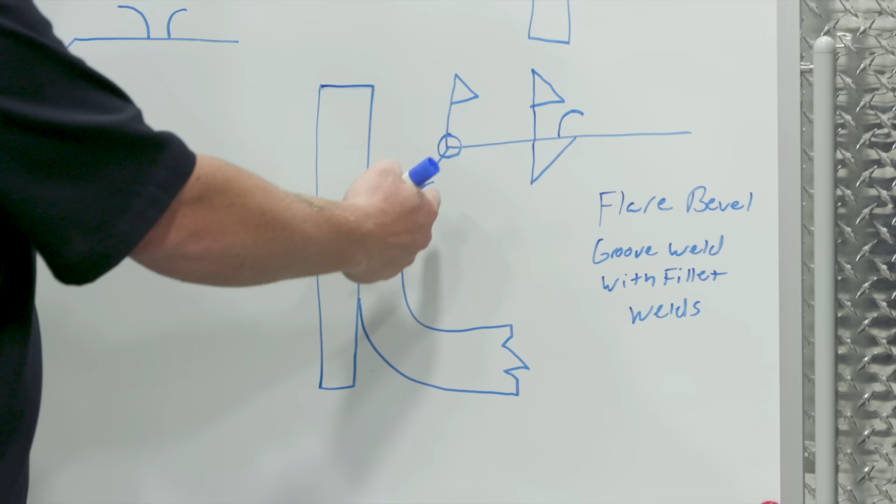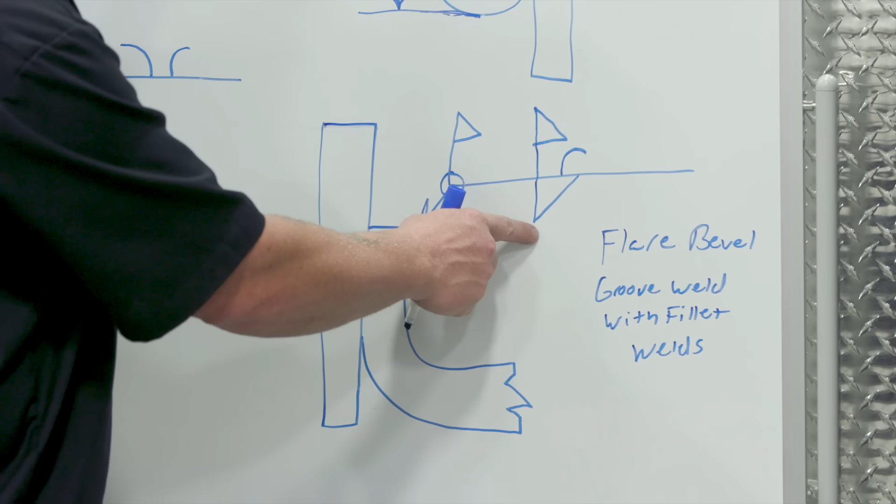This flare bevel down here looks complicated, but it's not. Let's break it down. What's the flag mean again? Right, we're going to make that weld in the field. This isn't going to occur in the shop. We're going to do this at the place, the final place of installation. So let's go ahead and start with the arrow side. On the arrow side, right, is the bottom. Arrow is pointing right here. So we're going to put in our fillet weld.

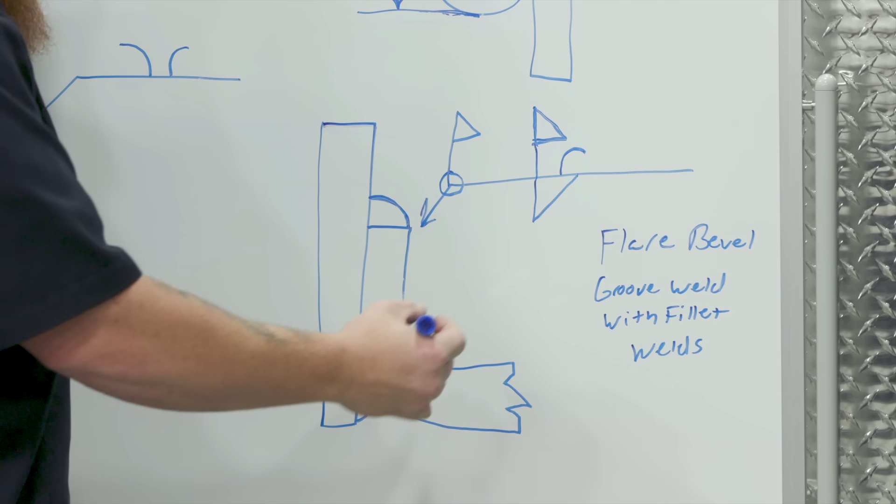Now it's telling us we need to fill in the flare bevel, other side. So that tells me right here I need to fill this in with that groove weld. And then I'm going to go ahead and put a fillet weld in addition, right? Because these are chained off from one another. So here's my first symbol for my flare bevel, and then I have a fillet weld that's going to go right over top of that. That's another way, instead of them chaining them out steps 1, 2, and 3, they can also be stacked upon one another. And then this side right here, that's just our regular fillet weld. We're going to put that right in here, and we'll just say that's 3/8.

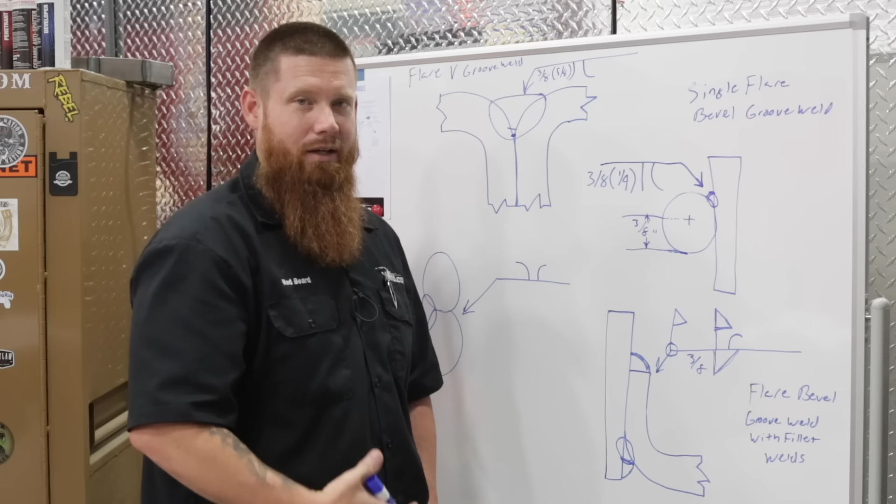These aren't meant to be used in construction. I mean, these drawings here, engineers are going to consult with them, so I don't recommend going out and drawing your own welding symbols and putting them into action without getting them certified by an engineer. This is just strictly for educational purposes.